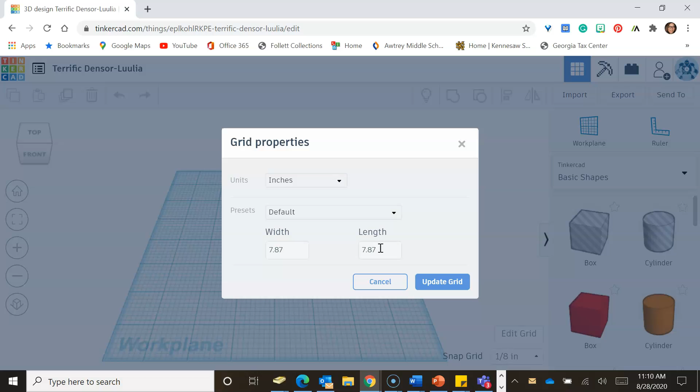We have some things here on the right-hand side. First, this is the grid, your work plane that you're building on. It defaults to millimeters instead of inches, and I changed it to inches because I'm used to doing things in inches. I can also change the width and length of the work plane, but I just left it default, and I'll click update even though I made no changes.

Then down here, I'm going to change this to a quarter inch so that it snaps in at every quarter inch, and I'll show you that in just a second.

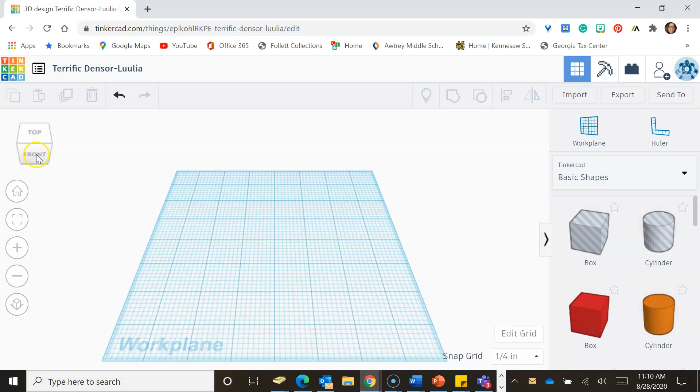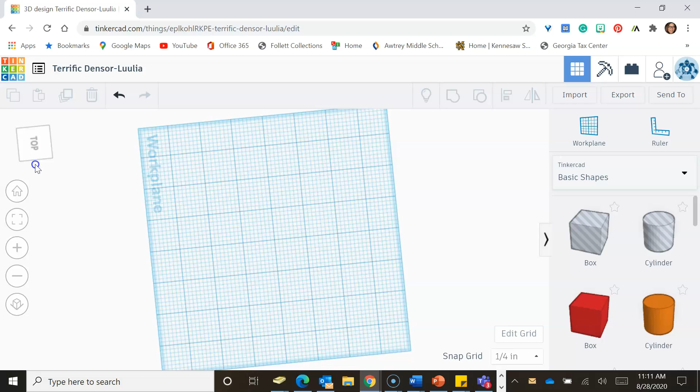The cool thing with this is I can rotate it to see the top, the back, the right, front, left, or the bottom. I'm going to do front and angle it just a little bit like we had it before.

So this is the work plane, and I can also add a ruler in if I'd like to, but I'm not going to do that right now.

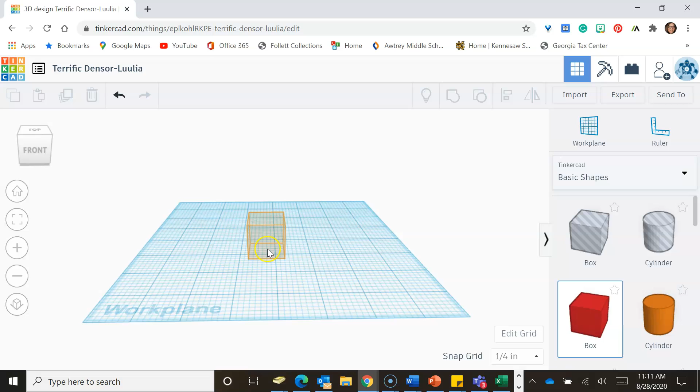I'm going to put a box on here. I just click on the box and position it where I want it. One thing you want to make sure of is that it's sitting level on the work plane and not hovering in the air. And it is, so I'm good to go there.

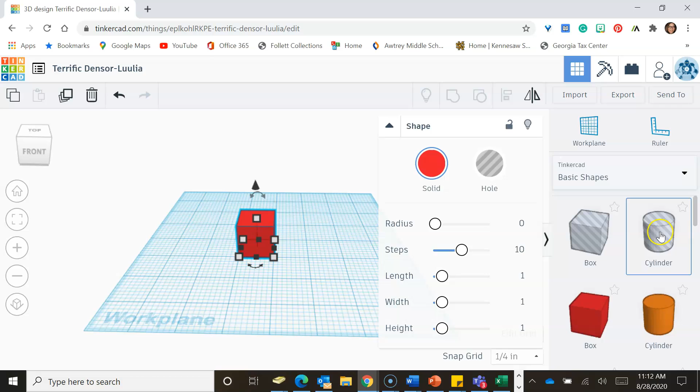It's asking me if I want it solid or as a hole, because the ones with lines through them make a hole in something. So what I may do is put a cylinder right here and make it a hole.

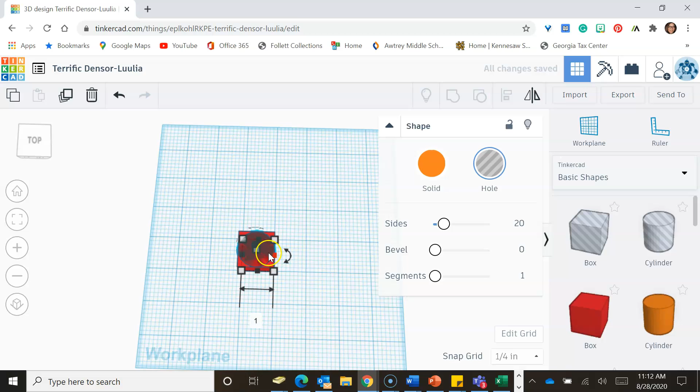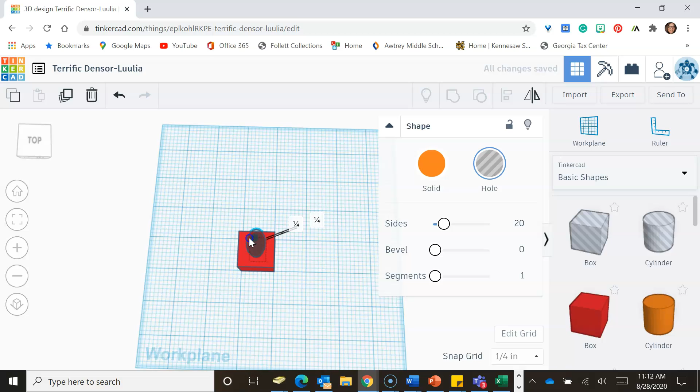What I'd do is rotate this so I can make it a little smaller, if it'll let me, and try to center it again. Notice how this is cutting off over here — if I left that there, that whole wall section would be cut off for as far down as the cylinder goes. That's why I'm trying to put it in the middle.

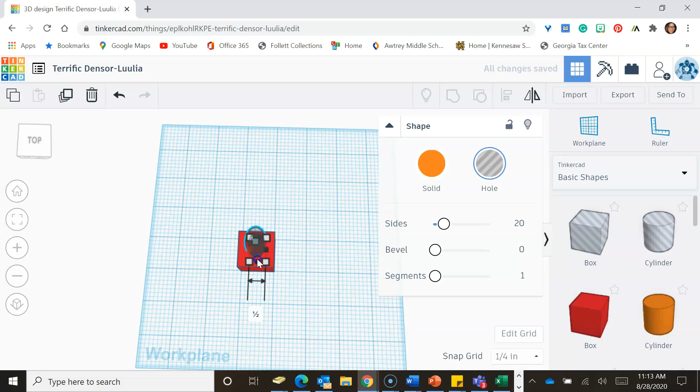It takes a little practice, and Miss Foster has not practiced much at all.

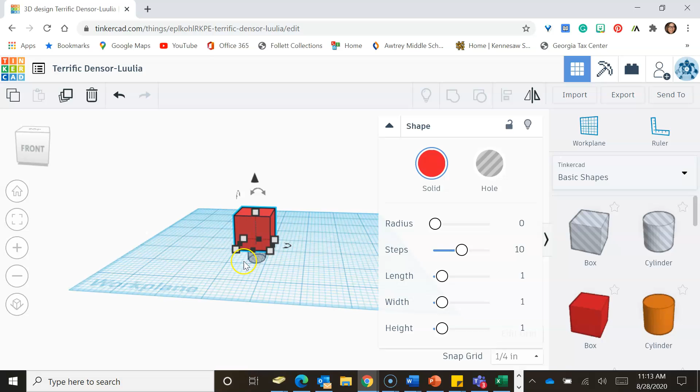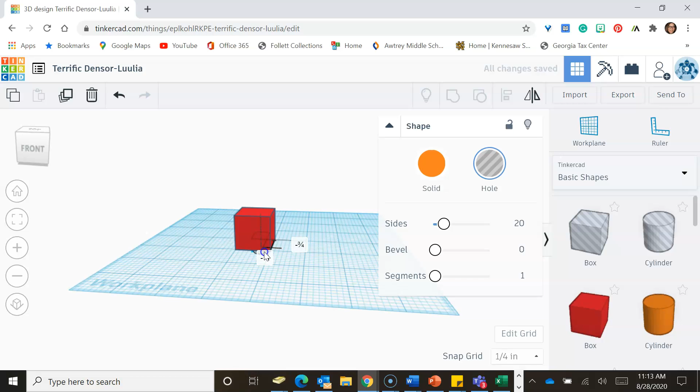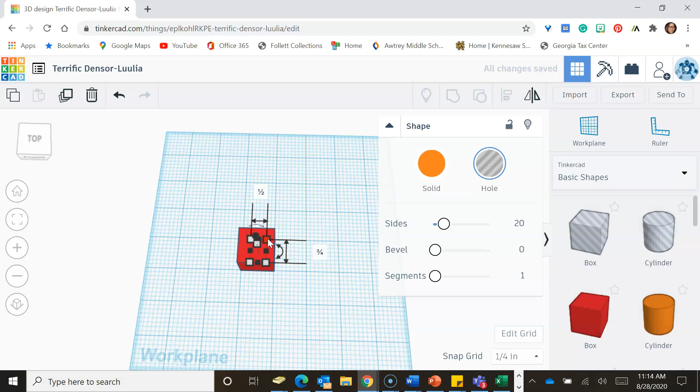We'll just do that smaller hole and see — I think it was hovering over it. Let me go back; actually it's underneath it. I think it's behind it now. Like I said, it just takes some playing with it. All right, I'm going to give up on it right now. But that's how you make a cylinder to cut out the middle part of something. I'm going to delete that because I think I was messing it up the more I played with it.

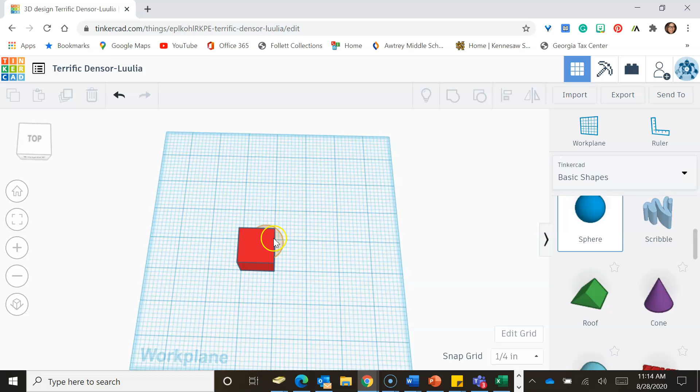But here's the cool thing, and this is new — I cannot wait to show you this. I'm going to come down here and put a sphere right next to it. We're going to overlap that sphere right there, shift it to make sure both are sitting on the plane. They are, and then watch this — I can hold down the shift key and get both of them selected, if I can get both of them on there.

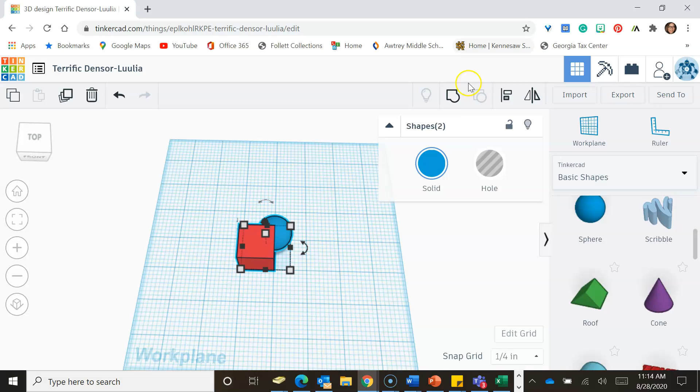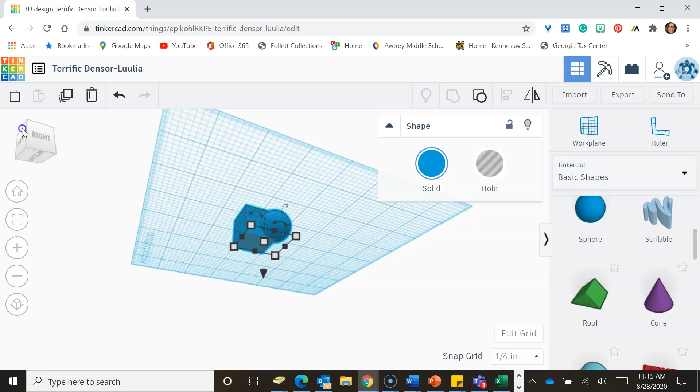I think I had it a second ago. Look at this tool right here. It takes both shapes and puts them together to be one solid piece. So I can change the look of my piece by taking different shapes and merging them together to make one solid piece. You see on this one how that sphere goes kind of into that cube there.

So let's see what other shapes they have. You can put text in, you can do wedges, you can do a pyramid, you can do a half sphere, a polygon. Let's do the polygon.

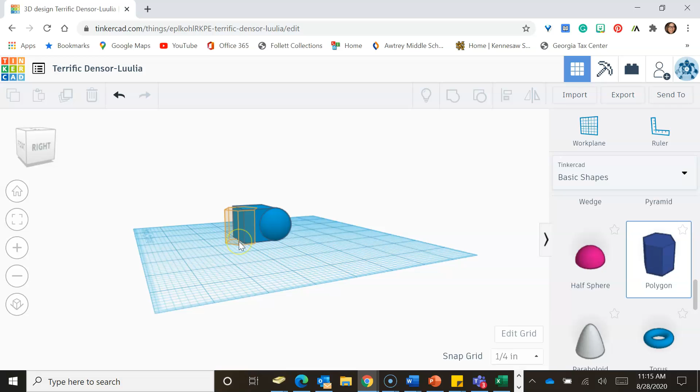Again, I'm going to try and overlap it onto that one. I'm going to hold down shift on both of them, and then see, I can group them here, or here I can ungroup them. I'm going to group them. Now let's see what it looks like. So it looks pretty cool.

So Miss Foster, what can I do with all this? Well, you can make something. You can make anything that you want to. So if you're working on a prototype for something, you can make a prototype. The only thing I ask you not to make is something you can buy cheaper elsewhere, because the filament does cost us to print it out. We don't print out Legos and stuff like that because it's cheaper just to buy Legos than it is for the filament.

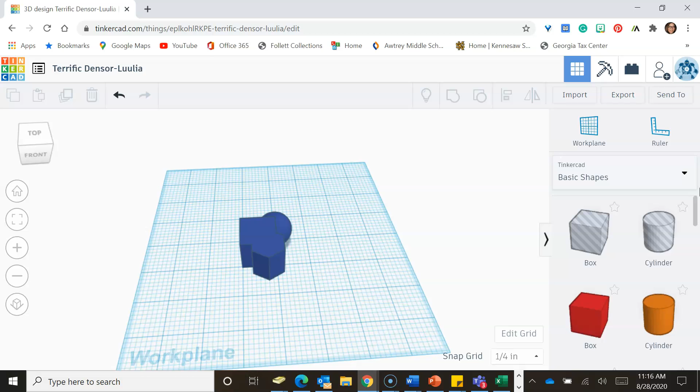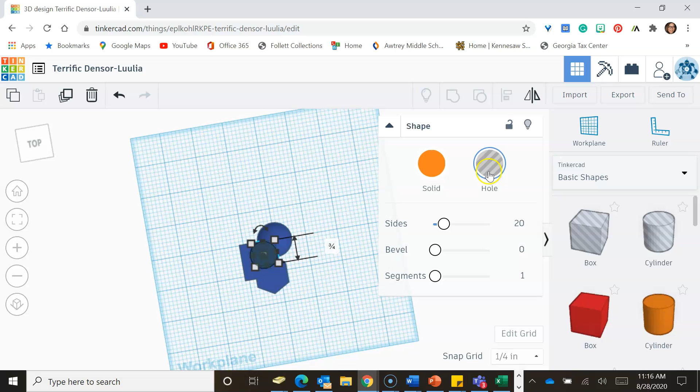But I'm going to try this one more time and see what happens here. So here's my top view. Let's see if maybe I should. Okay, so now see there's my hole. It's in the middle of the whole design. It kind of looks invisible there, but it does go all the way through because I've checked the bottom and the hole goes all the way through. So that's how you can put a hole in something.

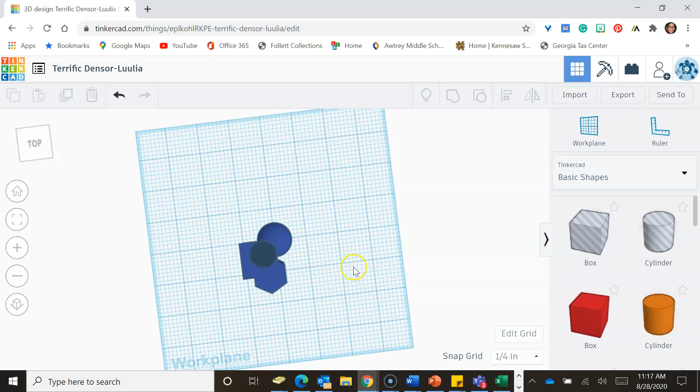Yeah, you can print whatever you'd like. You can send it to me. How you do that is you're going to export and download it to print it as a 3D. Here's the problem, I can never remember which one it is. I believe it is the STL, I'm almost positive I need the STL version. But if you save this in your Tinkercad account, then you can always go in later and change it if I need it. But I'm 90% positive it's STL. And then I can print it on our printer at school.

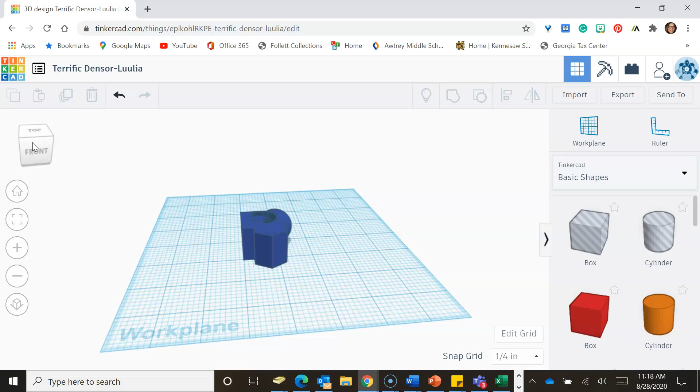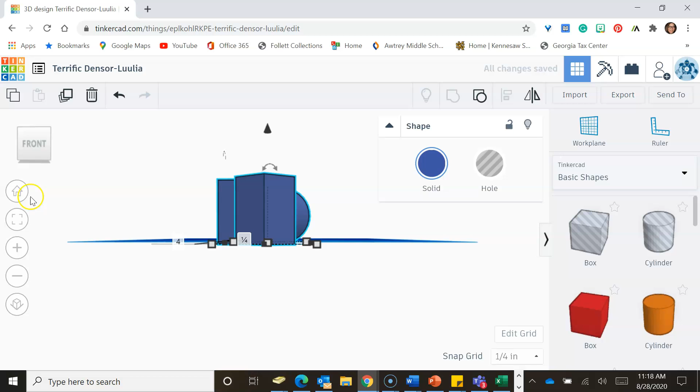Now, the one thing I cannot do is the color that's in there is the color that you get, so I can't do things in multiple colors. The other thing, too, that I need you to please, please, please make sure - and I mentioned it at the very beginning - is that it has to be sitting flat on the plane. If it is not sitting on the work plane and it is hovering up in the air, it will not work. It has to be sitting on the plane. It can go underneath it, but - and look, I just messed it up - oh, there we go. It can be sitting underneath the plane, but if it's not sitting on the plane, then it will not work at all.